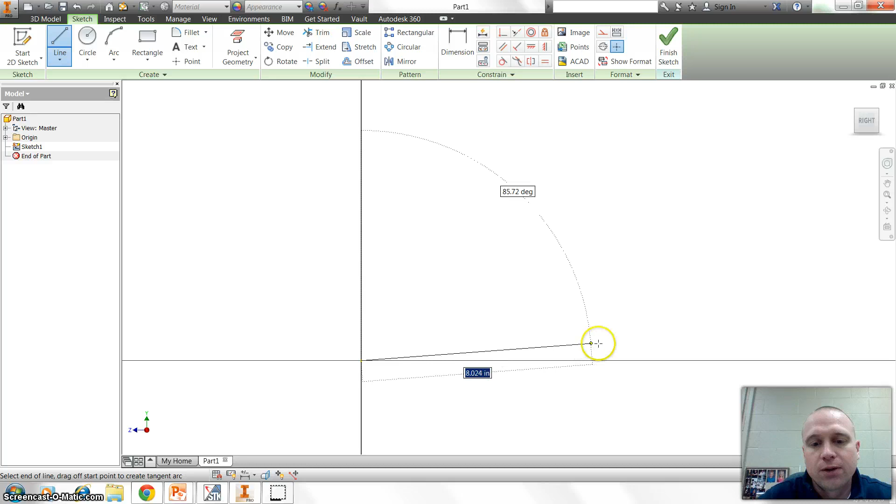Alright, the first step in modeling your truss in Inventor is you're going to want to draw the overall span width in. And so I'm going to make mine 9 inches. Once I have that span width in, I'm going to go ahead and grab my point tool, find the center of that 9 inches and draw a line straight up. And then I'm going to dimension my overall height that I need my truss to be. Make it 4 inches.

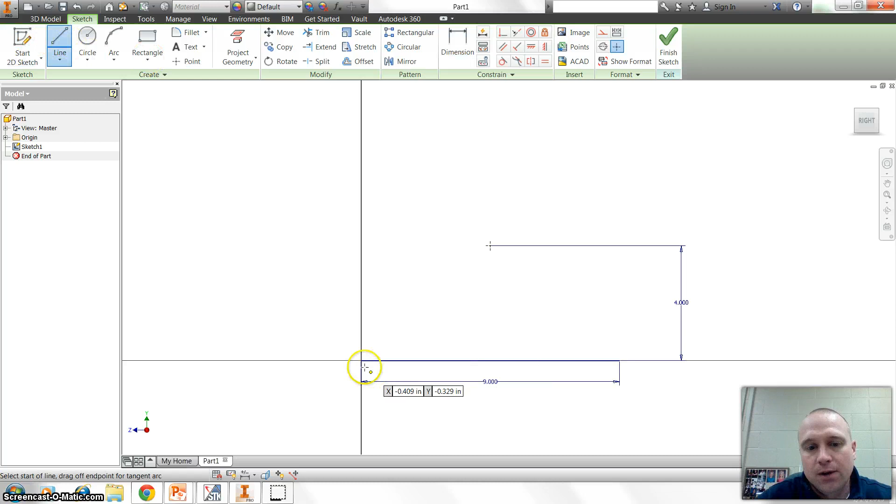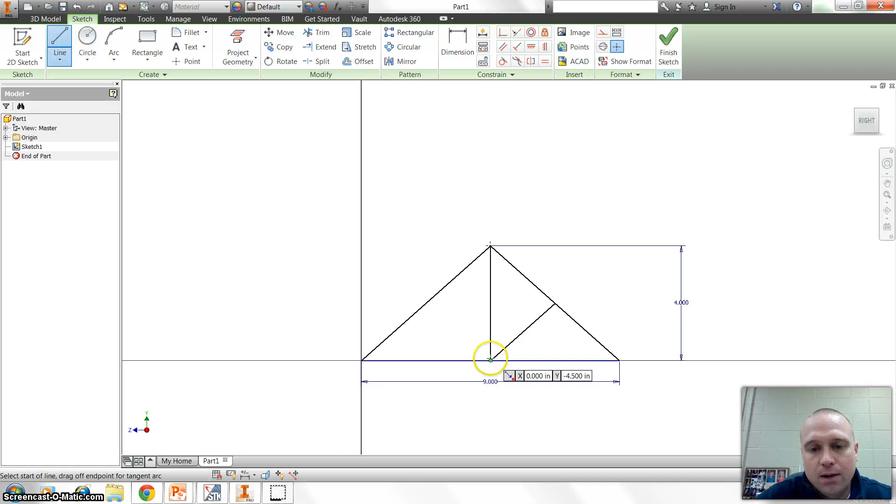From there I can add the angled lines that form triangular sides of the truss. I'm going to draw a line straight down to that side and connect one back to this side.

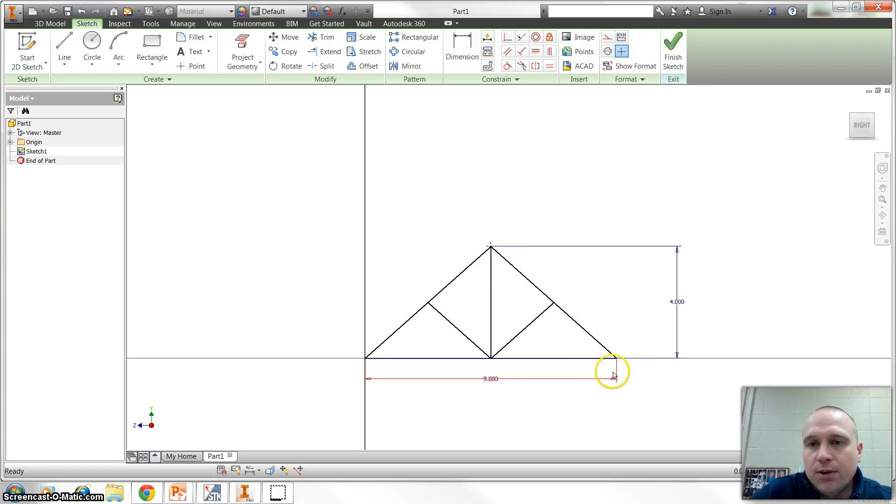So once you have the overall shape of the truss modeled as a sketch, the next step is going to be to change these from regular lines to construction lines. So I'm going to come up here and select all the lines. I'll change them to construction lines.

And then I'm going to use the offset tool to actually create the thickness for the truss. So I'm going to click, drag that out, and then I'll use the offset tool on the inside to draw the inside triangle. And then I'll dimension these, and let's say we are going to use a piece of 1/4 inch stock for this. So I'm going to put 0.25 divided by 2 so that the same amount is on either side. So there I have that part of this taken care of.

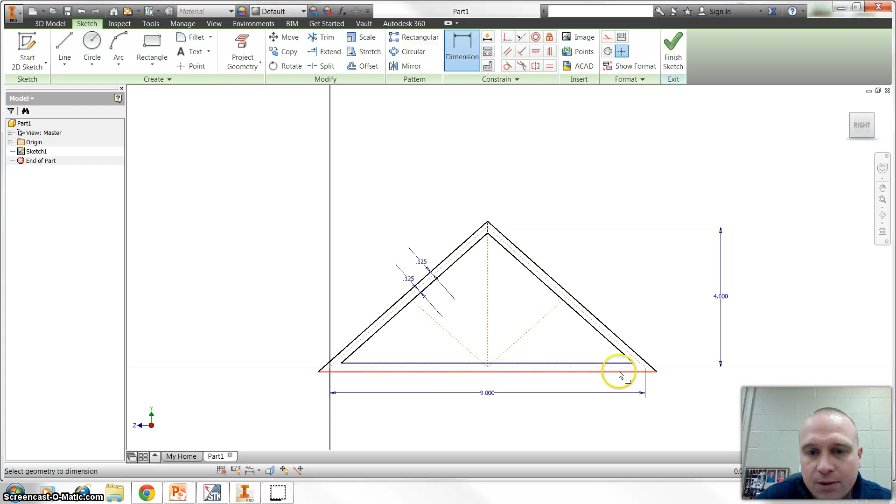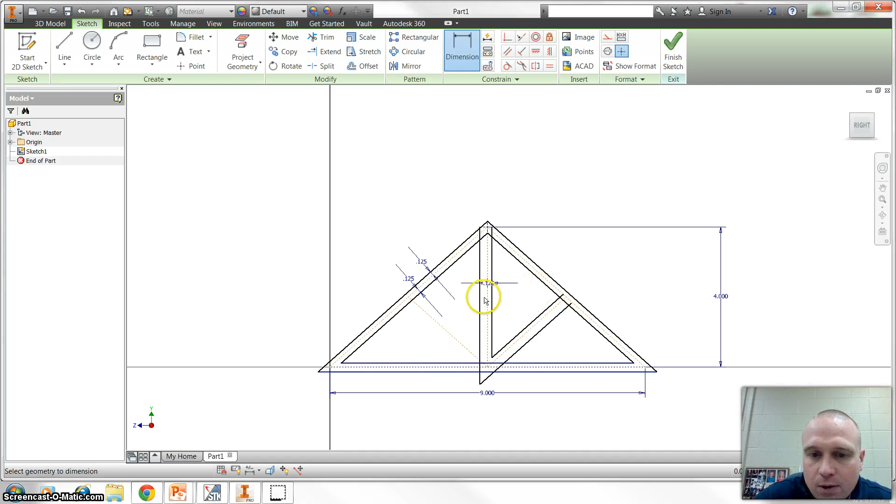The next step would be to do the internal members the same way. Drag, click and drag. Again, dimension them. Either put in the equation 0.25 divided by 2, or you could actually just put in 0.125.

You notice I'm getting some lines that are not needed on here, and so the trim tool is going to be your friend to come in and trim those extra lines up. And so I'll just click the trim tool. I'll trim all these extra lines before it gets really sloppy and hard to understand where the lines are coming from.

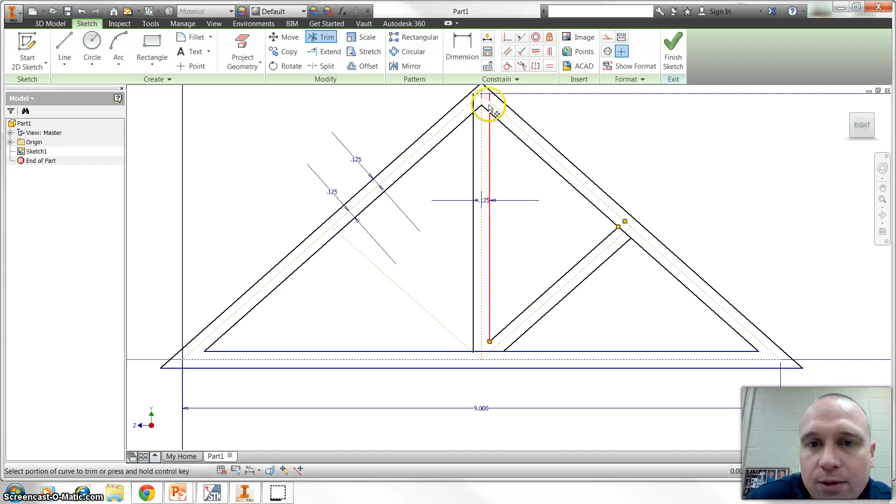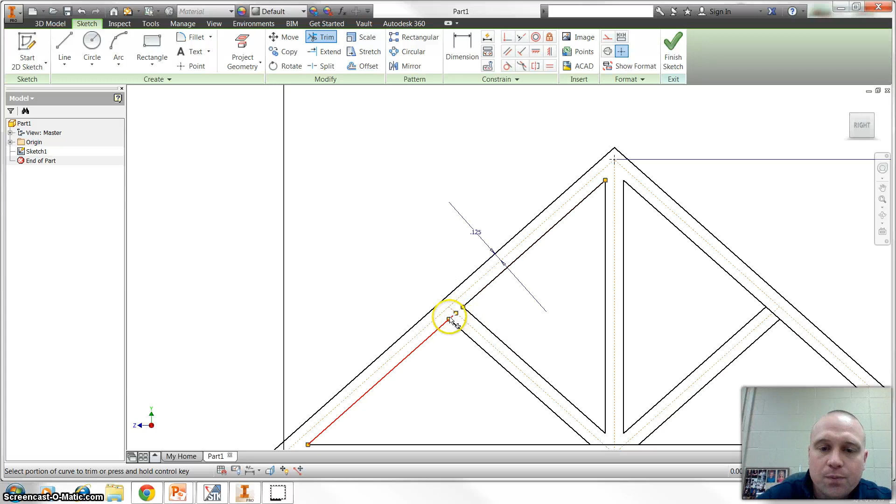The next step you're going to want to do is make sure you go inside and trim all of these internal members so you have one solid sketch that you can extrude to create the shape that you're going to use in your truss.

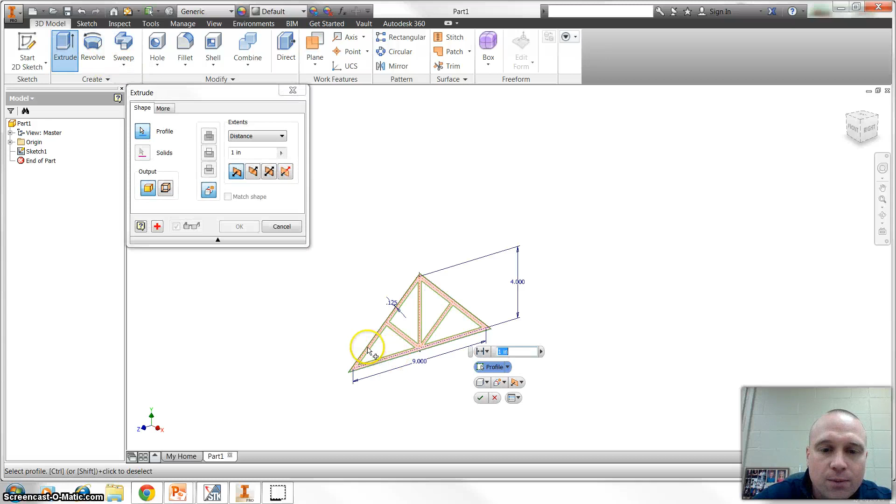So once you have that done, you can finish your sketch. Then you can add your extrusion to it. In this case, I'm going to extrude this out 1/8 of an inch. You're finished extruding your truss.

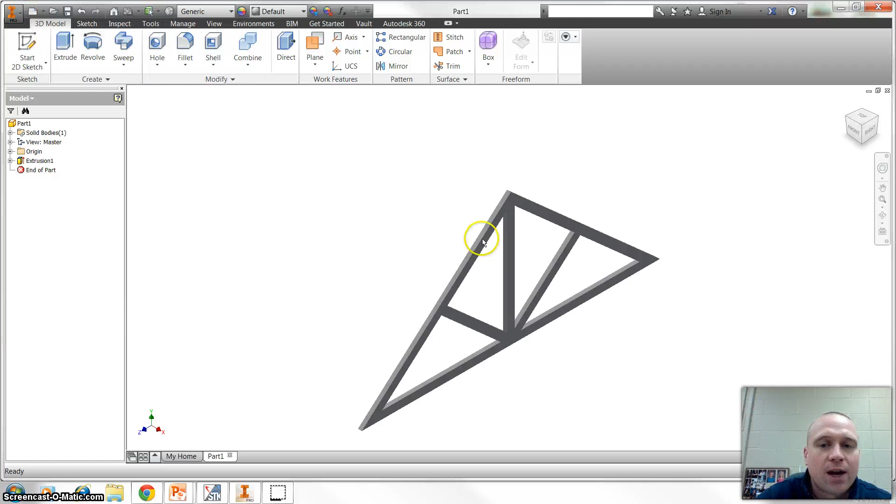Now to get it ready to 3D print, you need to export an STL file. So I'll go up here to the application button, go to export CAD format. I'll change it to STL. And then I'll click on options and make sure I change it to millimeters. Click OK and export the part. That's how you create a truss in Inventor.